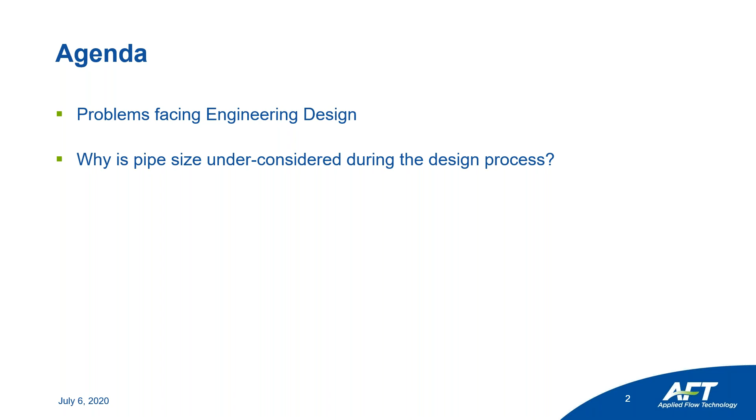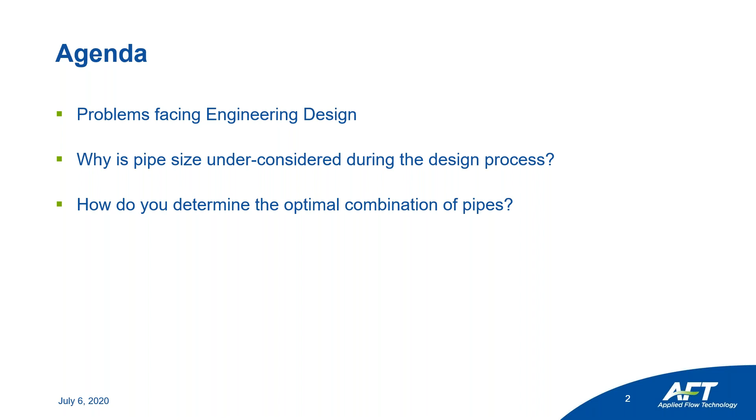We'll take a look at pipe size specifically, how that is under considered during the design process with an explanation why that is. Again, coming back to some of the problems facing engineering design. If we do consider pipe size as a variable we want to look at, we can see how we would determine what an optimal combination of pipes is. We'll see how the automated network sizing module, or the ANS module, can find that optimal combination. We'll see how it works, how the definitions that go into it are pretty intuitive and already exist for your system, before we jump into an example.

And so we'll work through a pretty rudimentary example where we'll define different things like design requirements and candidate sets, and all of this will be clear as we work through an introductory theory to what the ANS module is doing. Finally, we'll look at how we can expand the ANS module's capabilities. So beyond this rudimentary example, that'll take just minutes to set up, and we can reap immediate benefits on our system. We'll see how we can incorporate things like cost information and designing for different operating scenarios within the same design. So that's our agenda laid out.

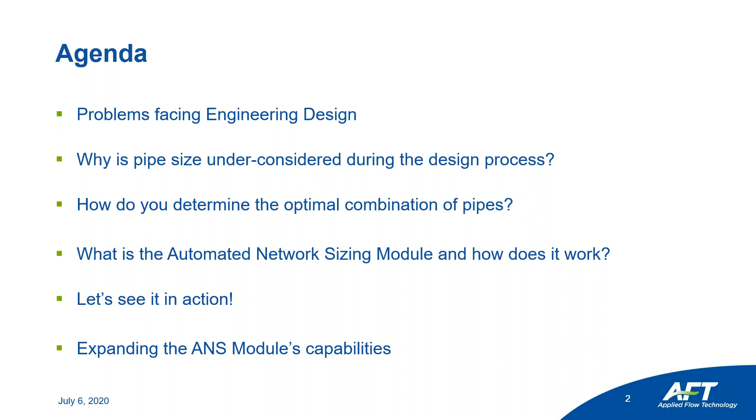Let's take a look at some of the problems that we see facing engineering design. So as I mentioned, one of the most important things that comes up when you're designing for an engineering system is making sure your design is coming in on time. Because engineering is a business, a lot of it is pushing projects forward, how you're allocating your resources. If one project gets delayed, those resources are now tied with that, and they can't be doing something else. So there's always trade-offs. It's always important to push designs forward, meet deadlines, even if it's spending time on the weekends or anything else.

With engineers specifically, engineering is kind of a fruitful job. It's one of the appeals of being an engineer. And so engineering time is expensive. And so pushing projects forward, making sure they're not facing delays, that's also saving the company money, but also ensuring that your design is being created on budget. So looking at your design, if you have a $1 million budget, it's hard to justify going over that. Generally, you want to come in under, and that'll make it look better on yourself. And so meeting these two criteria of being on time and being on budget are two of the most important facets of engineering design. But above all is creating a design that's going to work.

So you can take a simple design, quote it at $25 to build it, and spend 2 hours on it. But if your design never works and it can't be implemented, then all of that work was essentially for nothing. So first and foremost, above all, your design has to ensure that it works. So how do you define whether or not a design works or doesn't work? So this is where we can introduce the idea of a design requirement, or a specification that a design has to meet to work for the client or work for your business. And so some examples of design requirements, they can be flow rate specifications if you need a specific flow.

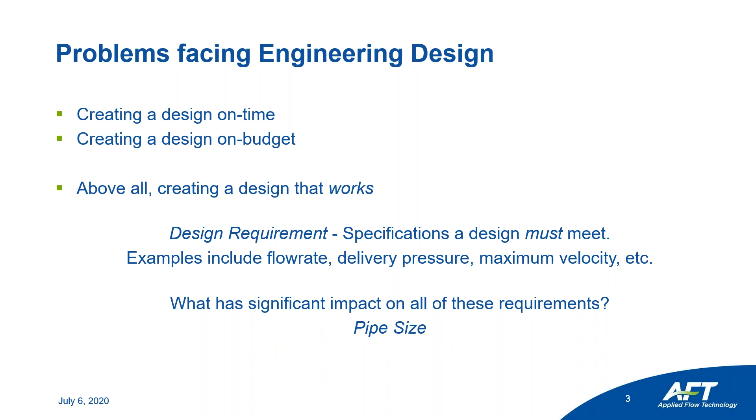And so now we can take a look and say, what has a significant impact on all of these different requirements? Sure, we can say pumps and components, losses through things, scaling, all these other factors, but the foundation to all these designs comes down to pipe size. So if we look at a very basic example, let's look at a small permutation between different pipe sizes. If we have a very small pipe and we make it larger, we will, for example, look at this velocity.

So by expanding that diameter, you're increasing the cross-sectional area. The velocity through it is going to decrease, potentially meeting that maximum velocity specification. Through a larger pipe, you're also going to see much less significant pressure drop. So that can help with your delivery pressure. And if you have less pressure drop, maybe that can improve your flow rate. However, by increasing your pipe size, you're going to see an increase in cost.

So if we look on the flip side and now we try to shrink our pipe size smaller and smaller, how is that going to impact our design requirements? So it's going to reduce our delivery pressure because you're going to see more losses through it. You're going to get a higher velocity. It can impact the flow rate. And if we look at it more as a pump and system interaction, a smaller pipe is going to require a much larger pump. And so you're going to see additional costs there, even if you're saving money up front by purchasing a much smaller pipe.

So there's some intermediate between the two that is really a cost minimum. And so all of these come down to cost benefit analysis. If the pipe is slightly bigger, you get these cost savings and cost additions. Same way if the pipe is smaller, but between there is some Goldilocks area. And so that's what we're going to be chasing. But why don't engineers consider pipe size as thoroughly as one would think, especially if it has this much impact on a system?

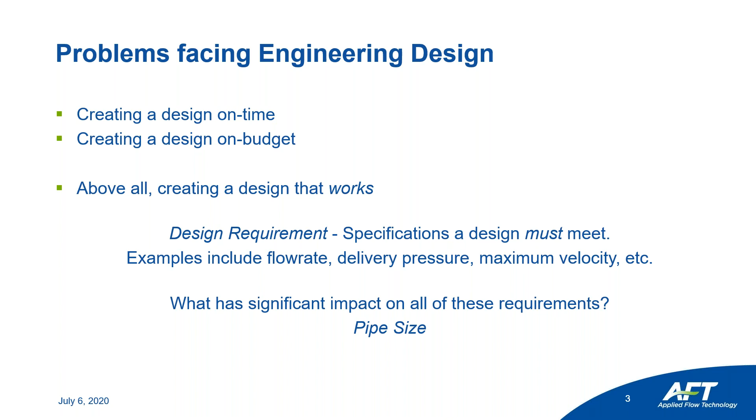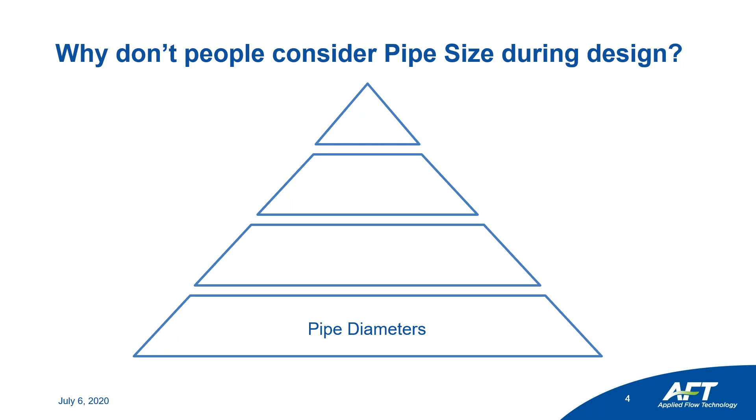Glad you asked. So if we look at engineering design as a pyramid, we have a foundational piece and then we can build upon that system. And that foundation is usually your pipe diameters. So once you create those pipe diameters so that it's meeting your basic system requirements or design requirements, then you can begin sizing your pumps and looking at different components, pulling specific data from data sheets, for example, to make your model as accurate as possible.

And those things are kind of interrelated where you can get a slightly larger pump or a slightly smaller pump if you have less pressure drop across a control valve, for example, or if you're operating close to BEP. But once you reach this phase of looking at components and doing pump sizing, rarely are you going to take a look at these pipe diameters. So you get pipe diameters as close as you can, hope that you don't run into an issue as you continue through the design process.

And so by fixing these pipe diameters, that's where it's not really considered because all of these changes down at the foundational level are going to have an impact on this additional engineering work. And so because all of this takes time, time is money, it's more expensive to try to perturb these pipe diameters and make small adjustments to see if there's marginal savings.

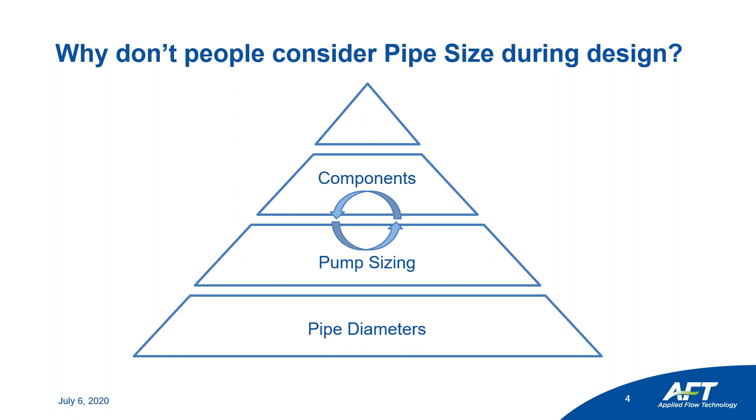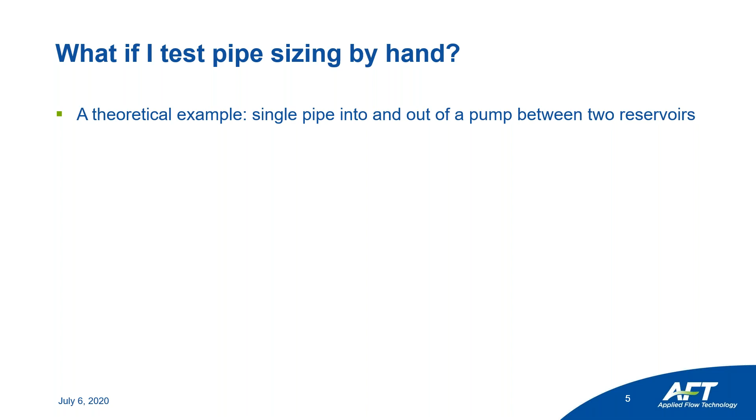And with pipe sizing, what we want is specific pipes that we can purchase. So we only want pipes within a specific range. We don't want a numerical pipe that is 3.34 inches in diameter because you're not going to make any savings by having that specifically manufactured. Instead, we want to pull from a catalog of different pipe sizes.

In this case, we'll call that a candidate set. So we want different potential pipe diameters we want to consider for this specific system. In our case, since we're doing a theoretical example and it's very general, we'll make a pretty wide candidate set, and we'll look at everything from 1/8 of an inch in diameter all the way up to 18 inches. This is actually truncated a little bit. This is based on ANSI steel inch pipe diameters, which can go all the way up to 48 inches, I believe. And so we're truncating it quite a bit just to serve as an example.

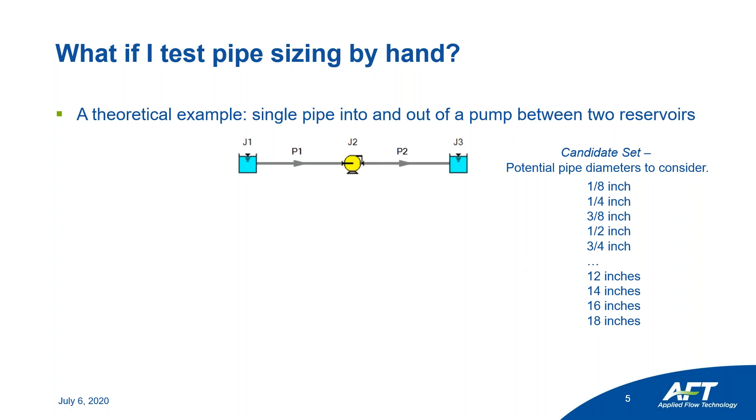So we have our entire candidate set where these two pipes can be 1/8 of an inch, 18 inches, 12 inches, 4 inches, really anything within this candidate set that we've defined. So if we break it down, each of these pipes will have 21 different options based on the candidate set we've selected. If we do sensitivity analysis where we're changing one pipe, keeping one fixed, and looking at every possible combination, we have 441 combinations to consider. So imagine in Fathom if you had 441 combinations in your different scenarios and you're trying to find which is going to balance out and which will meet your design requirements best.

And odds are your piping system isn't just two pipes as simple as this. So what if we look at something a little bit more complex, where now we have a 4-pipe system, we have a pump inlet, a pump outlet, and then we have a branch to 2 different reservoirs. Off the cuff, you may think that the combinations are going to more than double, so you'd see at least 1,000 combinations. But with these interacting variables, it escalates exponentially. So rather than the 400 combinations we had to consider before, now we have 194,000 combinations.

Now you could argue that some things may be unreasonable. Why would you have 1/8 of an inch pipe going into an 18-inch pipe? And so there you can truncate your candidate set even further. But as long as your number of pipes continues to increase, you're still going to see that exponential growth far outside what is reasonable for an engineer to spend time on to reap those marginal savings, which is a lot of the reason why a lot of engineers will figure out their pipe sizes, find one option that'll work, and move forward with the rest of the design process, again, to stay on time and to stay on budget.

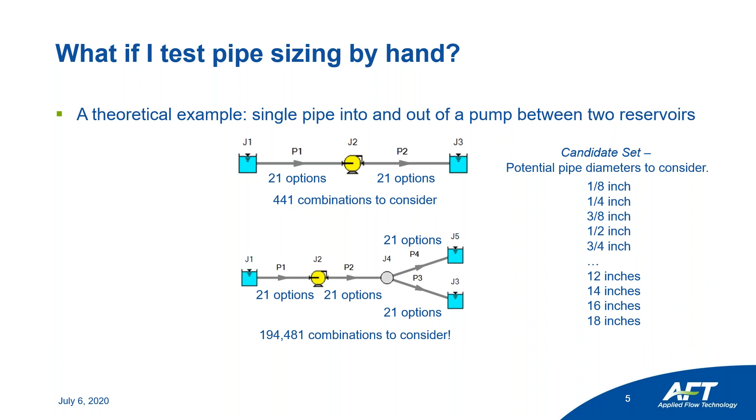So how do we reduce the number of possible combinations? We truncate our candidate set, though savings are much more marginal there, or look for areas in our model where we can make pipe combinations and create common size groups so that the number of variables down here is reduced.

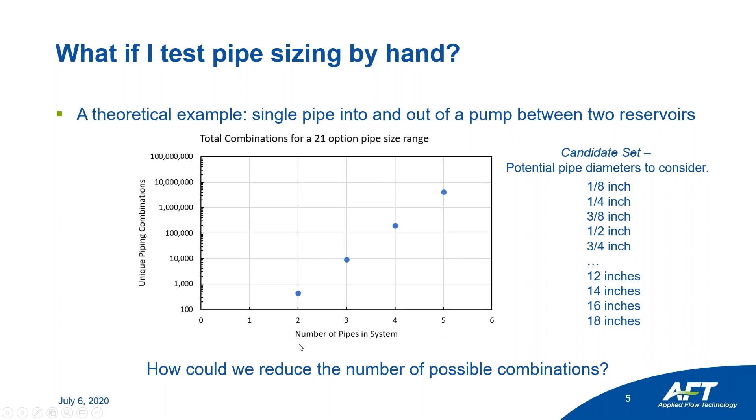So let's say now we're evaluating the different options as we're plugging in these different pipe sizes. How do we compare these different options to find which is better? The first distinction you want to make is the difference between a feasible and an infeasible design. Really, you only want to consider those designs that are going to meet your design requirements because, again, first and foremost, that's our entire goal of design.

But if we have a range of feasible designs, then we can start comparing them to find which among those fewer options are best for our system and are going to minimize things like a system cost. So this is where you involve something like a sizing objective, or what metric we want to use to compare different design alternatives. In essence, we have to think of this as a computer.

So we have to create something objective, something numerical that the computer can compare so that while it's running these different combinations, it knows, one, which direction to work in, and two, if it's found a minimum that'll meet your design requirements. So some different sizing objectives we can look at is pipe weight, for example. This is the most simple sizing objective because a lot of it is already built into Fathom.

Whether it is looking at different pipe diameters or you want to consider something like the weight of the fluid, that can all be considered without much additional work, and that'll be the example that we're going to work today. Taking a preview at some of the extended capabilities of the ANS module, you can look at things like capital cost. So if you know the price per foot of a pipe, you can consider capital cost instead. There you can incorporate things like pump and component costs as well.

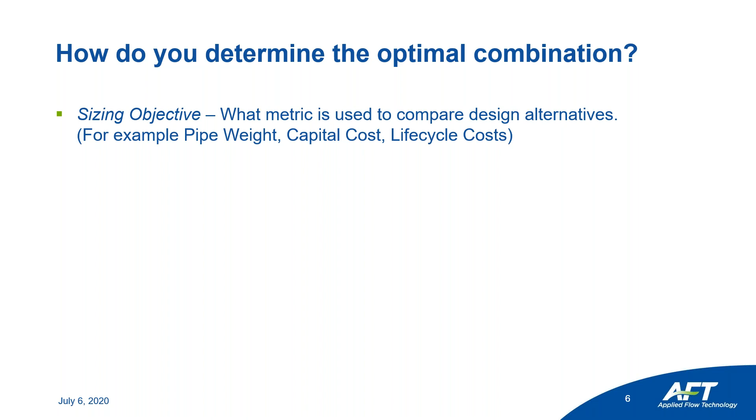This again comes back to the example, if we make a pipe slightly bigger, maybe our pump can run with less energy. We can recuperate the cost of the larger upfront pipe by reaping those savings on the energy back end. So in this case, let's do an example. Let's look at capital cost as our sizing objective. So in general, you can imagine a larger pipe has more material, and so as such, as the pipe grows, it will increase in cost.

Now you could argue things like maintenance or installation can sway these, and those can also be considered in the ANS module. But for our simple example, let's say pipe cost increases with pipe diameter. We can also take a look at our pump cost. So as the pipe gets very, very small, we're overcoming those larger and larger pressure drops. Whereas when our pipe is very large, there's pretty negligible pressure drop, and so our pump costs reduce.

If we sum these two together, we can see that there's a natural valley within this total cost. And we can call that our system cost minimum. So now if you're a computer and you're looking at this total cost, you can start at 30 inches in diameter, for example, move up to 32 inches, see there was an increase, and then move the other direction as you're trying to approach this minimum. In the same way, if you start at 10 inches and you move to 9 inches, you can see there's maybe a more steep increase in cost, and so maybe you make a bigger leap in the opposite direction.

So this is something that would take a lot of thought from an engineer, and with a lot of thought comes a lot of time. But for a computer, you can do thousands of comparisons per second as you approach this system cost minimum. So again, it's how are we phrasing the problem so that a computer can understand it and do all of the tedious iterations and comparison to find this system cost minimum.

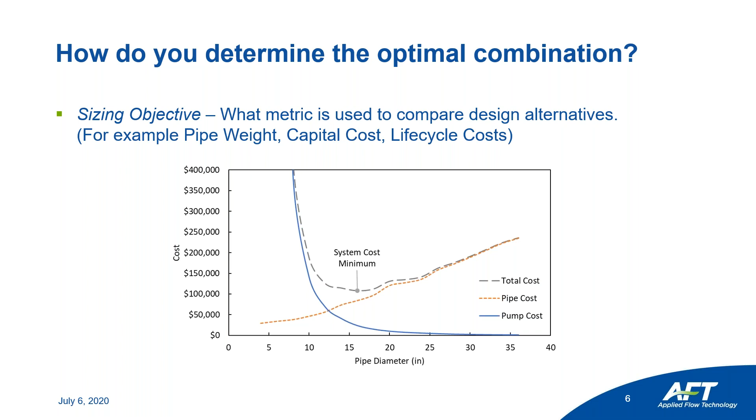So that brings us to the computer, which is the automated network sizing module. And so being built upon the hydraulic solver of AFT Fathom, or for compressible flow, AFT Arrow, it can base all of its testing by running that solver and do all of its little permutations in pipe diameter through the module itself.

And so the ANS module will take your initial design and it'll vary different pipe sizes based on that candidate set. So it's taking all those individual pipes, plugging them in, seeing if it'll be feasible and meet those design requirements, and the set that it's pulling from is that candidate set. So whether it's meeting those design requirements or not, is that infeasible or feasible? If it's determined to be feasible, now it's trying to approach that design objective.

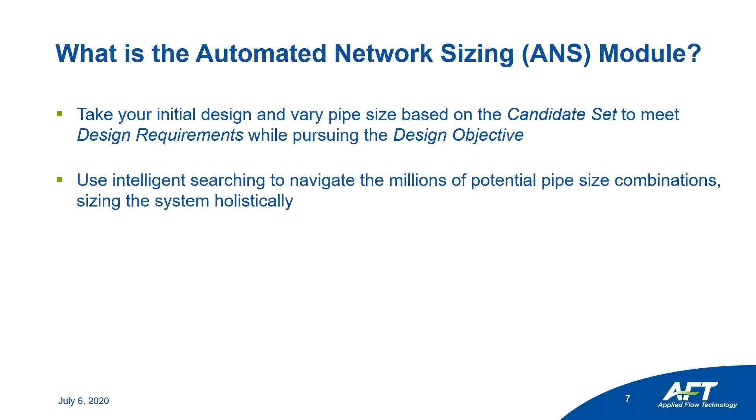And so with these very large systems, we can use intelligent searching to try to navigate the millions, if not billions and trillions of different potential pipe size combinations so that you're not doing brute force sensitivity and trying to find a needle in a haystack. The other thing is it's sizing the system holistically. So if a pipe is slightly larger on one end, maybe these other pipes can be slightly smaller. Again, trying to juggle this cost-benefit analysis for you by looking at the system as a whole.

As it's doing that juggling, it can also do cost analysis. So if you wanted to build out something like a cost database for all of your different pipes, diameters, and different components or pumps, then you can do comparison looking at minimizing initial investment or minimizing something like life cycle cost. So if you had a client looking to minimize cost upfront and that was the only concern, you could size your system to minimize that initial investment or to minimize that capital cost.

But since you already have all of that input in, you can also try running to minimize the capital and recurring costs. That way, it's much easier to justify to a client that, well, if you give me an additional $200,000, we can save you $500,000 on the overall system over the life of the system. Additionally, it can take into consideration things like the time value of money, but to not get ahead of myself, we'll talk about that a bit more towards the end, looking at some of the extended capabilities.

Another thing with the ANS module is we can look at some different operating conditions. So not all systems are going to be operating in one steady state all the time. So there has to be some flexibility there. So you can size one single system that will meet all of those different design requirements. One common example that we use is a residential water system, where not only does it need to meet the day-to-day flow rate requirements for all the households, but it also needs to meet peak demand during something like a fire.

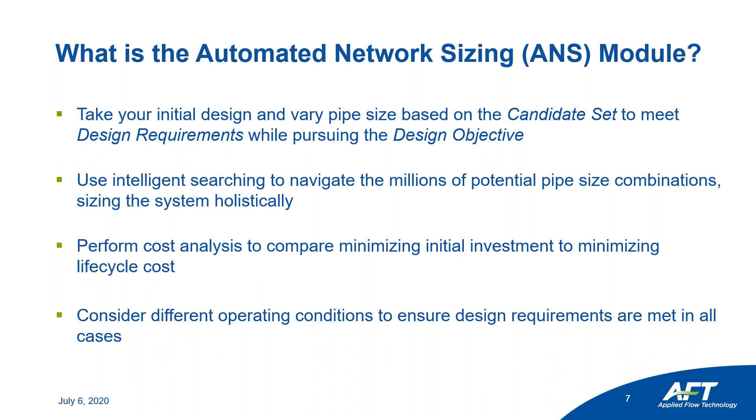So now we can see it in action. Enough talk, let's get into the software and see what we can do. And so the system that we're going to be sizing today is a heating loop system. And so all of these pumps down in the left, these are all going to be sized. And so we don't have pump curve information for them, but if we did, we could input that and still do the same sizing.

Similarly, with these flow control valves, these are all being sized. And so all of this is in the introductory level. We just know the lengths that we need to meet, and we're going to let the ANS module determine the pipe diameters. And so the easiest way to do that is by specifying all of these pipes as 16 inches. So rather than trying to spend the time and mess around with the pipes to get it close, we can let the ANS module take it from here after we just assume a single pipe size. What's interesting about this system is there's also going to be an expansion later on.

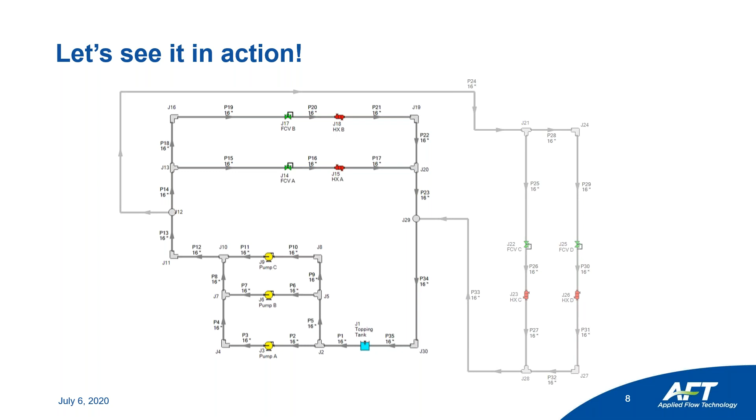And so because this is a brand new system, we can size the entire system at the beginning even though we don't have this expansion during that initial construction. And so that'll ensure that later on, we can still meet these flow requirements without breaking a maximum velocity through these pipes, for example. So by planning and having some foresight, we can take further advantage of the ANS module to size the expansion while we're sizing that initial system.

So now we can take a look at the software. And here we have our standard model. It's just a basic Fathom model where we still have our scenarios, we still have our toolbox. If we wanted to run it and get output, we can still do that. So let's actually try that and see what happens.

The reference pressure issue. So this may be something that you see in a similar situation where you're doing pump sizing and you're throwing these flow control valves where now you need a reference pressure downstream of these pumps and upstream of all of these different flow control valves. So let's talk about why this occurs first.

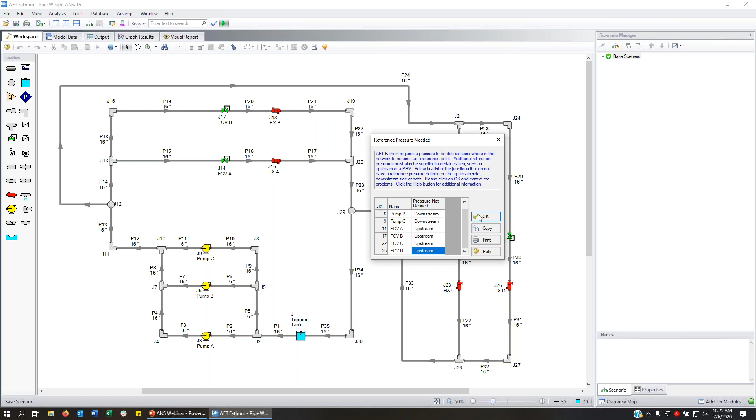So the way that I like to explain it is these pumps are currently in sizing. All we know is they need to output this fixed flow rate. This upstream pressure of the pump is informed by this tank, and the amount of pressure it has to add is dependent on this flow rate that we're specifying.

Similarly, if we look at these flow control valves, we can see they have a 1400 gallon per minute specification. The downstream pressure is informed by this tank, and this upstream pressure is kind of nebulous. This upstream pressure is defined by this downstream pressure of the pump, and because it can add as much pressure as it wants, this flow control valve can remove as much pressure as it wants. There isn't really a unique solution.

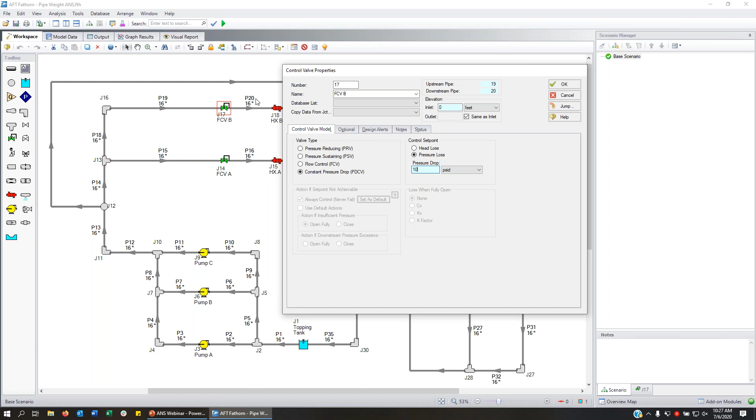And we actually have a full example dedicated to just this reference pressure issue where you're doing pump sizing with a flow control valve, why you need to define this internal section a bit differently so that you can do the sizing as you want. In our case, we're going to do the short version. Instead of having flow control valves on each end, we're going to change this to a constant pressure drop. And so we're going to use this constant pressure drop as kind of our minimum pressure for controllability.

And what that does is now we have this pressure, we can back it up, say 10 PSI fixed across this valve, and now this entire section has some point of reference pressure. You can also do that for this flow control valve, where we're just setting to 10 PSID. Now, if we want to do a run, calculations complete. Take a look at our output, no problem.

So any standard model can be used with the ANS module. Generally, new designs are better, or if you're doing something like an expansion where you're doing new design, because it's easier to just draw out the system and let the ANS module start from scratch so that you're reaping all those time benefits. So we have our base model that we're going to start with. Now we have to turn on the ANS module.

And so there's two ways that we can do that. First is down here under add-on modules, where it lists GSC, XTS, SSL, and ANS. Or we can go up to tools, activate modules, and click ANS. Now we can hit OK. So now, after activating the module, we can see that we have a new tab. So we have our 5 traditional windows, and now we have a new sizing window.

If we go into that, we can see down here is the sizing navigation panel, where we have our sizing objective, some sizing assignments, which we haven't talked about but are pretty intuitive, candidate sets, which we've talked about, design requirements, and then finally our sizing method. And so there's a lot of different parts that go into the sizing tab or window, and we'll go through it here as a pretty simple example.

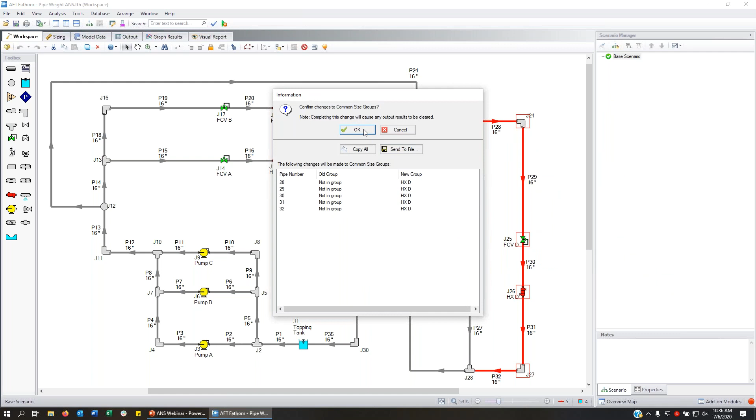We can just size all these pipes at the same time and say, well, I need 18 inches diameter, this amount of feet, rather than 18 inches, 16 inches, 18 inches. So there's a lot of different intuitive benefits there. So I'll add heat exchanger D. And then one more to add is just going to be this main header line.

And we could also, if we wanted to, go above and beyond and create a common size group between these two. But in our case, I think we've created enough. So looking at this system, it's kind of hard to tell where we've drawn our different common size groups. So the easiest way that we can see it is going up to View, color our common size groups. And if we want to look at a very specific one, we can do that, where they'll highlight as we add them, or we can view all of our common size groups. So here it's very clear to see at a glance where the different common size groups are.

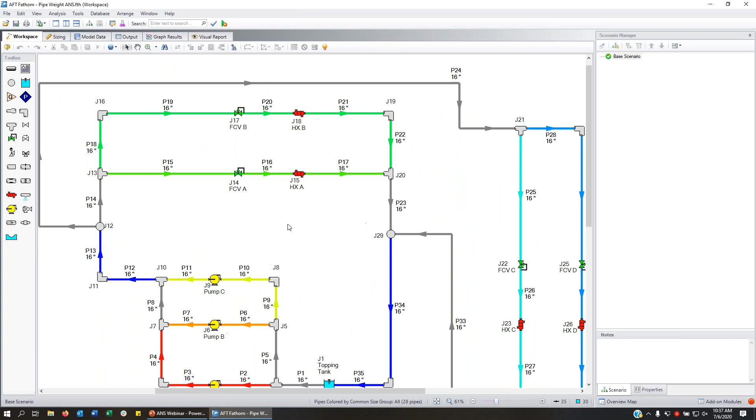And if we go to our sizing pane, now we can see our different groups here, where we can organize them by the group as well. So if I know pipe 2, 3, 4, I can see 2, 3, 4, again, the same pipes. So we can see they're all checked, they're all specified. Now we have 15 independent pipe size groups rather than the 35 that we would have started with. So again, now we've cut the pipe sizes in more than half. Rather than reducing the number of possible combinations by half, that exponential decay goes the same way. And now we have far fewer potential combinations to consider.

The next step is looking at candidate sets. So now as it's doing its sizing, where is it pulling these different pipe sizes from? It's going to be this candidate set. In our case, we're doing a very intro sizing, and so I want to consider the widest range possible. So we'll just build out an ANSI steel with standard gauge, which we can select already built out for us. So if I wanted to be more specific, I could look at 1-inch increments. But again, in our case, I want to consider the full range.

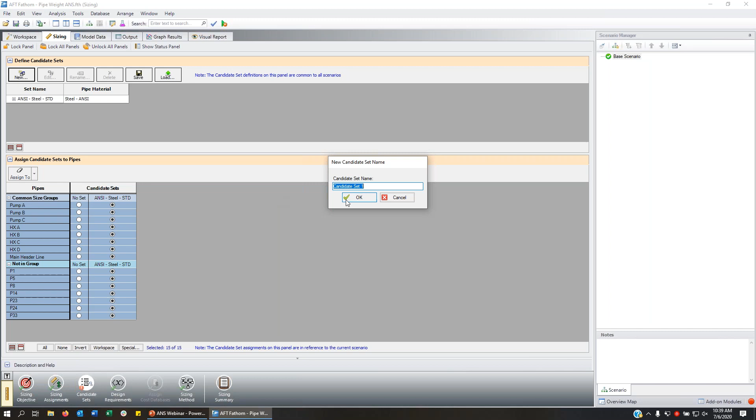So we have our ANSI steel, we can say okay. And now we can assign all of them to our candidate set that we've created. If, for example, we were looking at the other side of these heat exchangers, where we link the two heat exchangers, and let's say we had a copper system going through the other side, well, we can also size that same system in the same sizing pass by creating a secondary candidate set of copper, where we can move these over based on which common size group they're in, or move individual pipes over. So there's flexibility there by defining this candidate set.

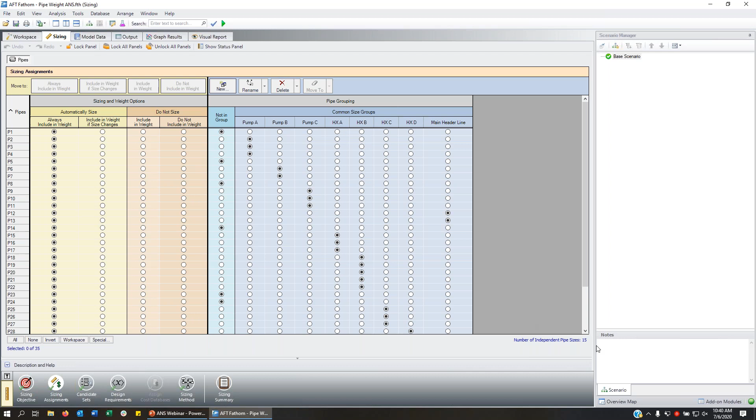So here we've earned our green check mark. We can work our way through with our sizing objective, how the computer's comparing, our sizing assignment, where all of our pipes are being sized because it's an initial design. We have our common size groups to help reduce this number of independent pipe sizes. And it's going to be pulling pipes from our candidate set, which we've specified here.

Now is kind of the bread and butter and where the most engineering thinking goes in, and that's in defining these different design requirements. And so again, how do we know our system's going to work, and what is really the criteria for whether a system works or not? That's where these design requirements come in. So we're going to add a few. We can create a new design requirement. In this case, we're going to have a minimum flow through heat exchangers A and B.

And here's some different parameters that we can specify with the ANS module. So if, for example, your design needs to account for things like overcoming elevation change in addition to overcoming pressure changes, hydraulic grade line may be a good option. We can also look at things like margin above vapor pressure if you have an NPSH requirement, or if you're pumping something very volatile like methane. We can also take a look at the pressure drop across it, as well as specifying pressure at a point where it has to meet this delivery pressure, for example.

In our case, we're going to be looking at volumetric flow rate, where we need a minimum of 1,400 gallons per minute. And here we're going to specify that for heat exchanger A and heat exchanger B. And then we're also going to create a minimum flow for our other heat exchangers, C and D. Again, specify volumetric flow, set a minimum, and we have a 1,300 gallon per minute flow.

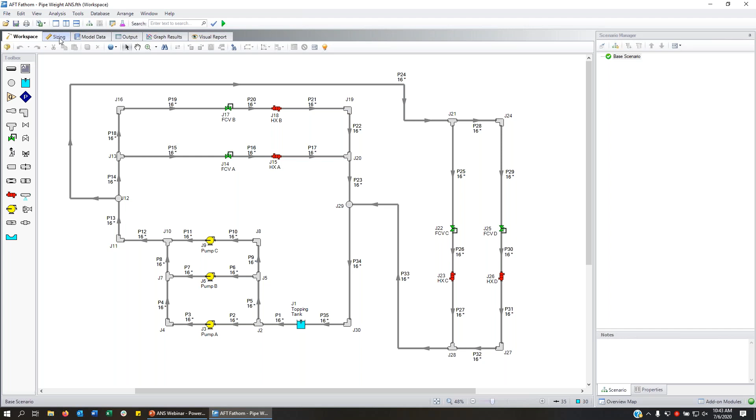And with the ANS module, similar to Fathom, you can iterate and explore different options; that's just a scenario you can run. And so even if you don't include a minimum velocity or a maximum velocity, you'll find out pretty soon that your results may be a bit skewed. And so here we're going to apply this max velocity to all of them, and then we'll go up and define it as a maximum velocity of 10 feet per second. So here's all of our pipe design requirements. You can also look at different pump requirements. In this case, we're going to also add a control valve requirement.

So here we're going to add a minimum pressure drop, and that's the pressure drop across the different valves. So we're going to look at a stagnation pressure drop. We want at minimum 10 psid. Again, similar to the other control valves where we set that as our minimum pressure drop for controllability. We're going to apply that to the control valves, which are still flow control valves. So now we're kind of double defining those valves where they need to have this pressure drop and at least this flow rate through them so that we know they're going to be controlling.

So now we've earned our green check mark on our design requirement. We have all of our green check marks. Our status light is green with all of our sizing input corrected. If we wanted to, we could do our first run, but before that, we're going to take a look at our sizing method. So here, the first distinction to make is this sizing type. So continuous sizing just means that it's going to find the numerical minimum of this piping system. So if this pipe needs to be 7.67 inches in diameter, that's the lowest cost that we can get it to.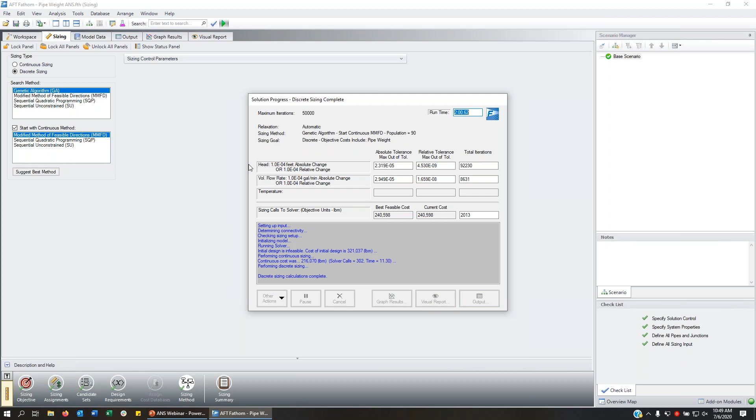So here we can take a look at this sizing tab, which is specific to the ANS module, since now we're comparing before and after. And this is convenient because our starting point is all 16 inches, so any deviation from that is pretty clear to see in our output. So we can see some pipes increased, some pipes decreased, which means they were initially oversized, some even down to 8 inches and up to 18 inches for these main header lines.

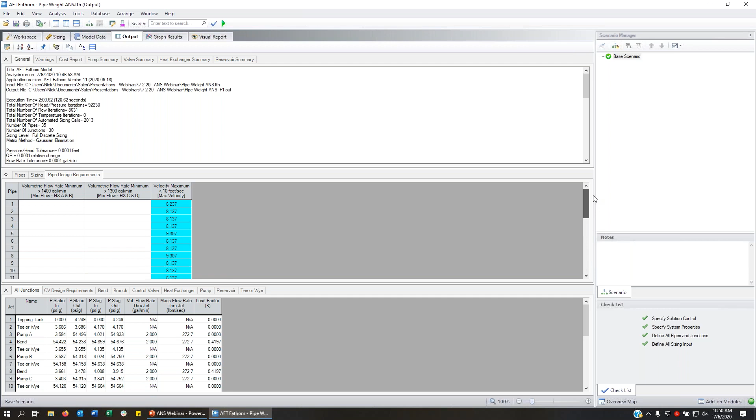And so with that, again, it's juggling all these different things. How do you make sure that you're meeting your design requirements, which you can actually see here. So if we scroll down, you'll see that some are highlighted blue. That's generally the design requirements that are guiding the design. So pipes 28 through 32, we see the highest maximum velocity that we've seen in this column, because that pipe is what's really governing that maximum velocity.

Similarly, with these flow rates, we can see that these are closest to the minimum. The reason these are exactly 1300 is because of that flow control valve. It's just setting that flow rate. And similarly, up here, we can see that 1400. You can also look at our control valve design requirements, where we have our pressure drop of at least 10 PSI across the valves.

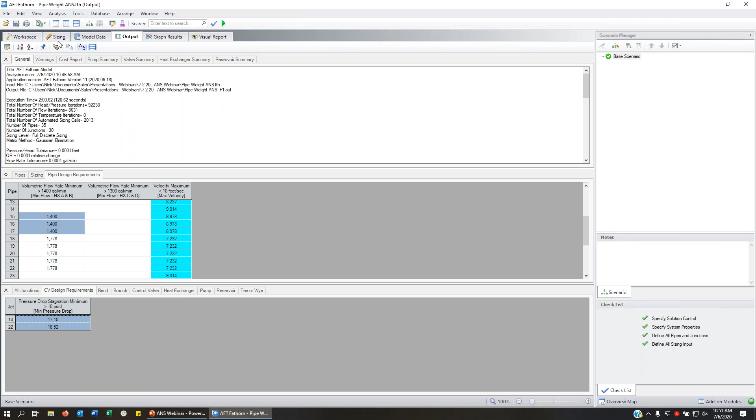And so now let's say we're done with our run and we want to transfer these results over. Similar to the GSC module, if you have any experience with that, we can transfer results to initial guesses and we can transfer these calculated pipe sizes. Then if we wanted to do sizing, say do not size, and run our model, we can see now our runtime is far less than 2 minutes.

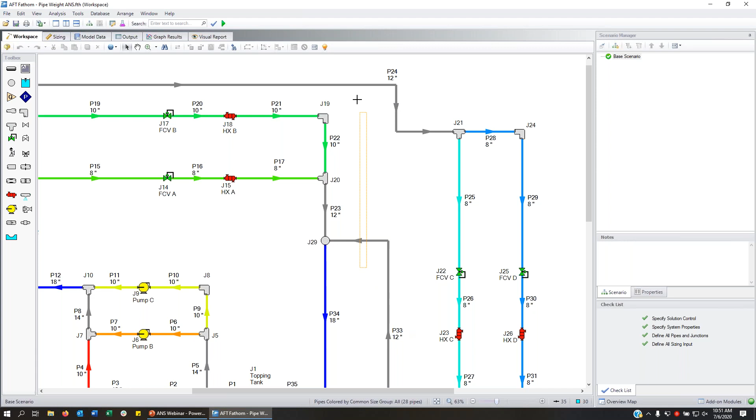And we can also see in our workspace that now it's updated with these new pipe sizes. So some lines, like the header lines, have increased to 18. These are all fitting the same 8-inch pipe as well as the same 10-inch pipe. And we also see some natural common size groups where this 12-inch pipe and this 12-inch pipe are similar. So this could have been an area where we could have improved our runtime by making another common size group. Similarly across here. But all in all, not too bad for additional input, especially if you're doing these initial designs.

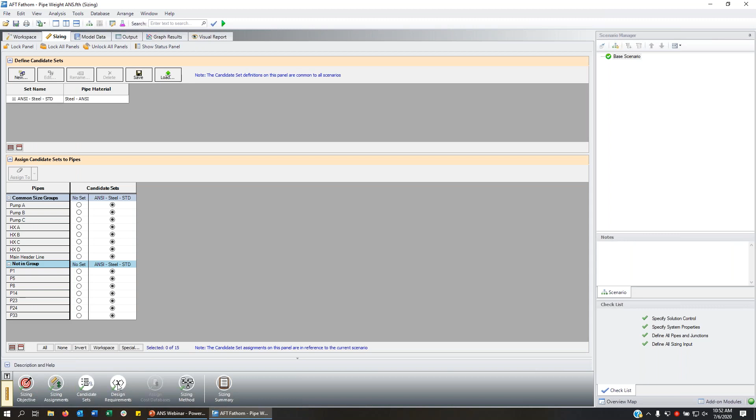And so that's the ANS module. Here's the sizing tab. It walks you through it pretty easily. Again, going from the sizing objective, which the computer is using to compare designs, the sizing assignments, which is which pipes are we sizing, candidate sets, or where we're pulling pipes from, or which pipes we're plugging into our design, how we know if our design is feasible or not, if it's meeting those design requirements, and finally, how we're approaching that system cost minimum.

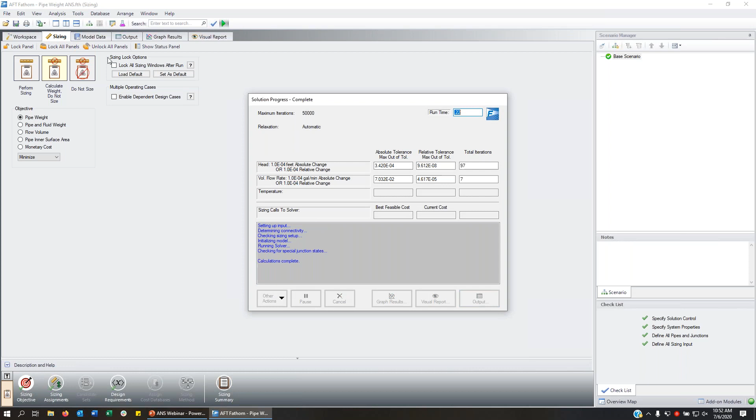One other thing, and this would be much more elaborate in the cost situations, is if we calculate weight but do not size. So now I just want to see what the system weighs. We can go to output and we can take a look at our cost report. And so now we have our total pipe weight and we can see which parts are most significant.

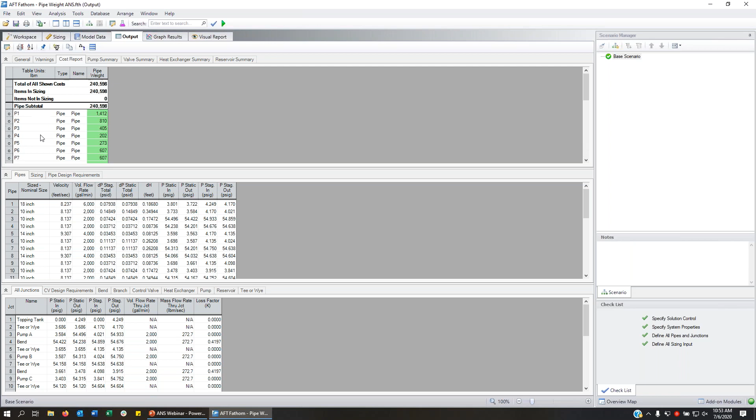So if you wanted to adjust your design requirements to maybe adjust where areas of super high cost are, then you can make those adjustments, run it again, and do kind of easier iterations rather than just wasting time trying to see which pipes make your design work. So it's kind of expanding that analysis so that it's more fruitful rather than trying to make a design that works. So that's everything I wanted to show in software.

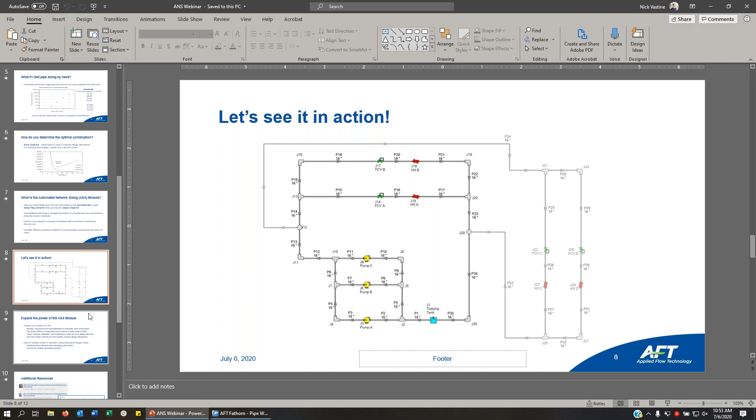We have a few more points in the PowerPoint. And so a lot of these I alluded to a bit earlier with the ANS module. The first is looking at your system for cost. So there's a few different ways that this can be incorporated, whether that's developing a component and cost database. So if you have frequent valves that you like to use or specific pumps that you have an agreement with the manufacturer, you can build those out and plug those into the ANS module as well.

And also looking at pipes in general. So if you have pipe diameter, dollar per foot of pipe, including installation, maintenance, material, all of that can be built out. And that way the solver can pull from that information to find that system cost minimum. We also have things like scale tables. So if you only have information for a 1-inch valve and a 4-inch valve, it can extrapolate between the two. Again, because we're looking for marginal returns and we're trying to find the minimum within a system or within an interaction of variables, by extrapolating, you can still approach that cost minimum because the costs are still going to be proportional.

You can also factor in things like material, installation and maintenance. So that's kind of discussing those pipe sizes as you're building a database out. And you can also use time value of money to back up things, especially when you're looking at recurring costs, so that all of your different design alternatives are on the same footing.

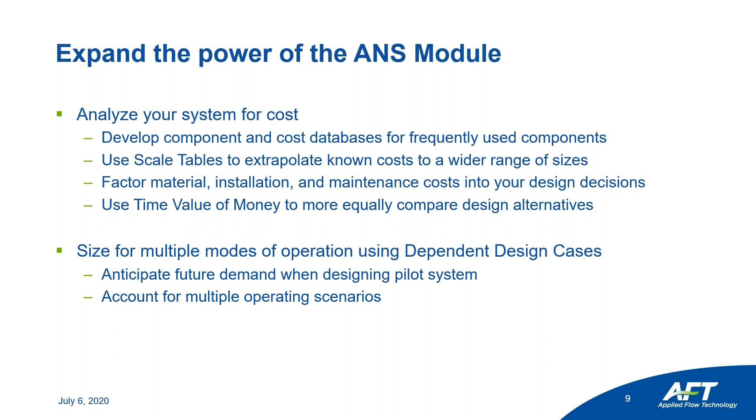So that first example is anticipating future demand if you're looking at an expansion, or you can account for multiple operating scenarios, again calling back to the residential area and the firemen both having different design requirements which have to be met, though not at the same time.

So if you found a lot of value, or you're starting to consider pipe size as something you think you should look at, we have a lot of additional resources. So we have a collection of blogs. One is from our president and founder, Trey Walters, who talks about how the ANS module has been brought from some of our previous products like AFT Titan and AFT Mercury to work with our core products like AFT Fathom and Arrow, so that you can reap these sizing benefits to minimize your system costs.

We have a couple of articles from Stephanie on the support team, talking about what the ANS module is asking for. So this will talk about things like the objective and candidate sets and design requirements. Hopefully you guys are all experts by now, and how you can size up different options. And I have a blog about dependent design cases, or how you can create one design that meets all these different design requirements all in one run.

I also wrote a white paper called 5 Issues Automated Network Sizing Will Solve for the Time-Deficient Engineer. And so this kind of breaks it down more on a manager level of some of the appeal that pipe sizing has, in addition to weighing all those cost-benefit analyses.

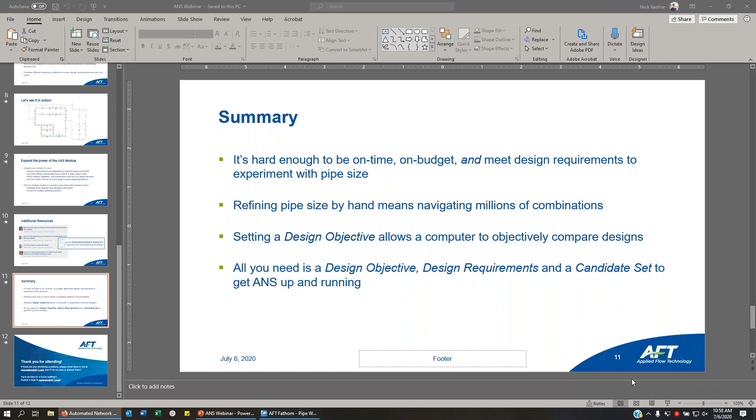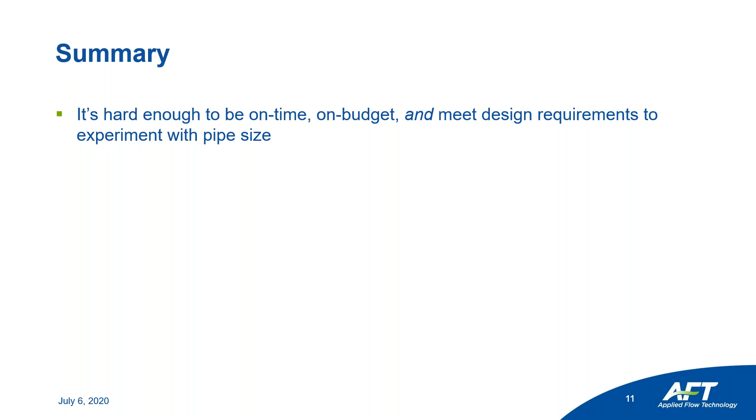Now let's take a look at this summary. And so what is the ANS module for? Well, for engineers, it's hard to be on time, on budget, and meet all those design requirements to experiment with pipe size. And because it's the foundation of all your designs, it's not something you're likely to play with later. Refining pipe size by hand is millions, if not billions, of combinations, depending on the size of your model. Something essentially impossible, finding a needle in a haystack.

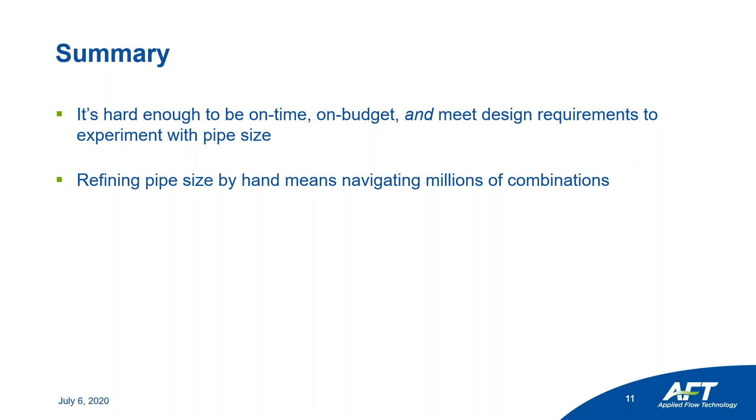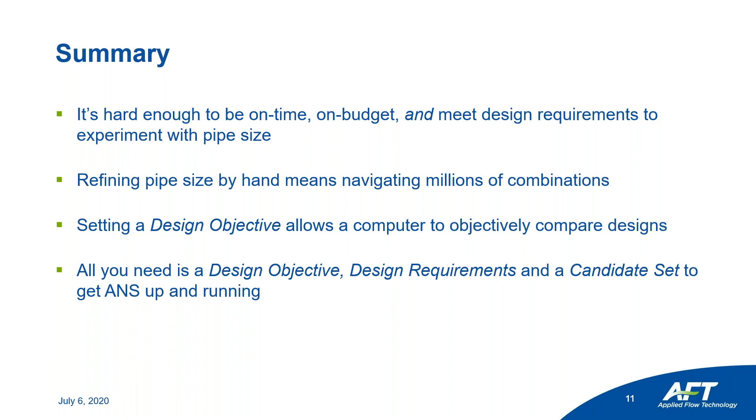But to computers it's pretty trivial, since it can run all these different calculations and comparisons thousands of times per minute. Creating a design objective is what enables that computer to objectively compare those designs. And to get the ANS module running, all you really need is design objectives, design requirements, candidate sets, and a few other small things like which pipes you're sizing. That's all you really need to get the ANS module up and running.

And that's about it. Hopefully you've learned a lot in the past hour. I'm glad you could spend your time here. Even if you don't take a look at the ANS module, maybe you're taking a second thought about how you're doing your pipe sizing and some of the marginal gains that you can get.